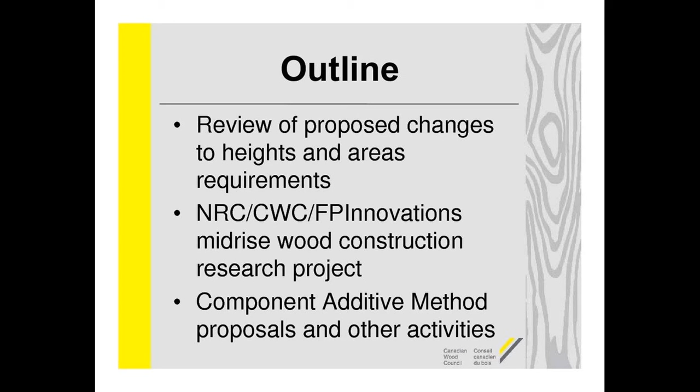As some of you are aware, our code is now an objective-based code, but all the acceptable solutions are still found in Division B of our code nationally. It's Division B subsection 322 that talks about how to construct a building in terms of heights and areas based on construction type and occupancy type.

Our code has come to the point in 2010 where we really only consider in Canada two types of construction: combustible construction and non-combustible construction. That's different from a lot of other jurisdictions—even the United States has multiple types of construction that allow different heights and areas for those different types. In our system, even heavy timber construction has really become just a very small, specialty subset of combustible construction, and there aren't a lot of different provisions in terms of heights and areas when you're using heavy timber construction.

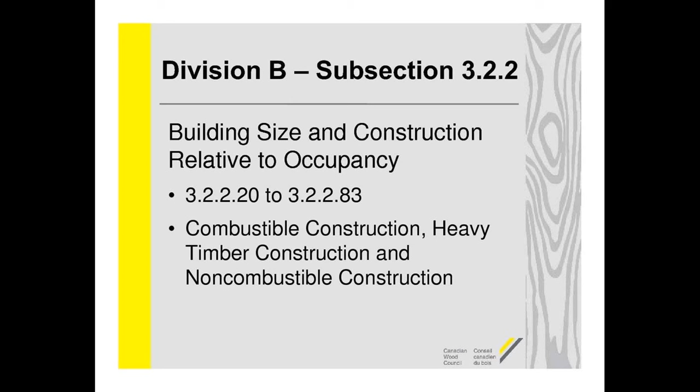So this is just a summary example of how our code deals with heights and areas in terms of number of stories and the maximum building area, basically the footprint of a building. There's a very specific definition of how to calculate the building area. But within the context of an occupancy type and the number of stories, the maximum allowable building area changes depending on whether you've got a sprinklered or unsprinklered building, and whether, when unsprinklered, it faces 1, 2, or 3 streets—that's for firefighter access. The greater the number of streets faced, the greater the building area permitted.

So that's how our code currently works, and this is just one example of the residential type Group C. There's also an example here for business type, and the reason I mention these two is because these are two of the areas that the mid-rise code change proposals particularly targeted.

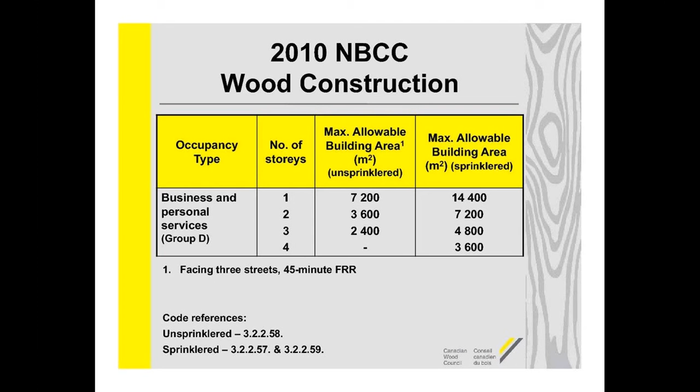Now, not all of you are familiar with the national code process, so I'm going to give you a little bit of an idea of how it works in general, to understand how the code change proposals were developed for mid-rise. The CCBFC, the Canadian Commission on Building and Fire Codes, is a volunteer stakeholder organization that works with the Code Center at NRC as the secretariat, which basically provides the overall policy and guidance to the national codes in Canada. They do that in consultation and partnership with PTPACC, the Provincial Territorial Policy Advisory Committee on Codes.

That one always gets me.

The provinces are directly linked because they're the ones required under the law to implement building codes, to adopt and implement them. They have their own ideas of the things in their provinces that are important to them, what areas they believe need to be looked at. The idea is that at the national level, we try to coordinate the priorities based on the provincial priorities.

And so they have provided quite a bit more guidance in recent years as the structure was developed. Under the CCBFC are the standing committees, which are the technical bodies, again made up of volunteers from all segments of the construction industry, that provide technical recommendations to the CCBFC on code changes that are necessary or desired. For example, the Standing Committee on Fire Protection or the Standing Committee on Houses and Small Buildings.

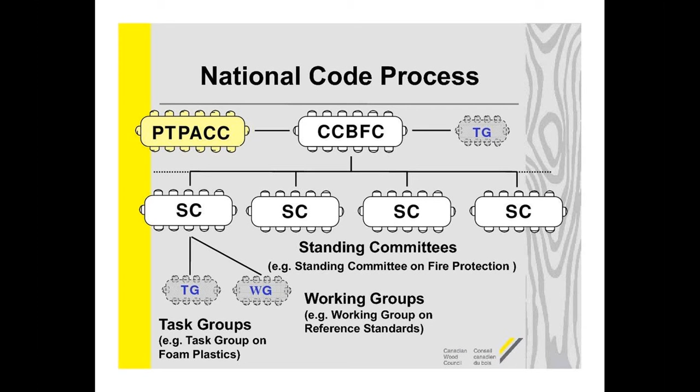When it came to combustible construction, in 2009, some of you are aware, British Columbia put forward a change to their code related to 5- and 6-story combustible construction for residential only. Partly due to that, and due to interest in that code change proposal in other provinces, and because the Canadian Wood Council also was interested in seeing mid-rise combustible construction...

...it was decided that a joint task group should be created, that this should be something done in the 2015 code cycle, to look at the whole question of why our codes deal with combustible and non-combustible construction the way they do. So the Joint Task Group was formed based on that policy decision that this was something that should be looked at.

There are often joint task groups when there are topics that affect or deal with more than one topic or part of the code. In this case, it was decided that the joint task group should actually report to 5 different standing committees.

And actually, I'm pretty sure that almost all the other standing committees have looked at these code change proposals as well. Even the Part 9 Standing Committee on Houses and Small Buildings has at least reviewed the code change proposals in their meetings, just to keep an overall view of the whole process.

So the Joint Task Group was formed, and it was set up, like any other task group, to be made up of stakeholders. The Code Centre has a policy within that system to make sure that you have full representation for all the interested stakeholders, as well as regional representation. So there were regulators, industry reps, general interest groups, fire services, different provincial and municipal regulatory bodies, as well as the construction material interest groups.

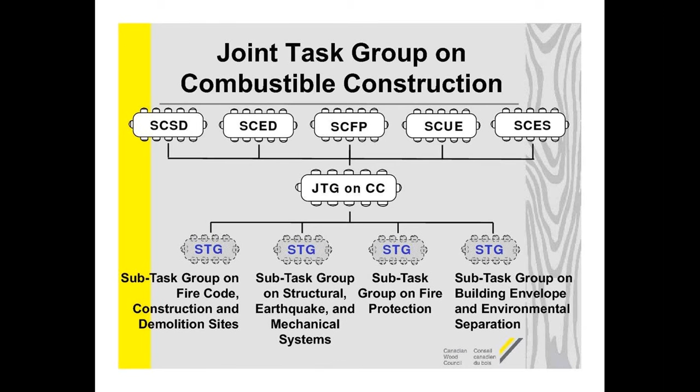And so that's where we came to today. The Standing Committees provided, or recommended, a finalized version go to public consultation this fall, and the CCBFC agreed that the package could go out this fall.

As you're probably aware, there's a public consultation ongoing right now, and as I didn't realize until just over a week ago, the closing date has moved from December 13th to December 23rd, which is good for me because I haven't reviewed all the code change proposals outside this package yet, and I need that time.

But as I just alluded to, this public consultation is much more than just the 5 and 6 story issue, and you guys have been talking about some of the other areas. There are a lot of very interesting code change proposals in this package, in part because this is the last major public consultation for the 2015 code. So it's a jam-packed session, really.

So when it comes to the actual code changes for mid-rise, as I said, one of the bases for the original discussions was what British Columbia did. On this slide, you've got 1, 2, 3, and 4 stories for Group C residential on the left-hand side showing what's currently in the National Building Code, and then what's encircled in red is what British Columbia did in 2009, as an interim change, and then formalized in their 2012 code last year.

What they did was take a methodology that's been pretty consistent in a lot of sections of our code for height scenarios, sometimes referred to as the wedding cake approach, although that's not really a fully appropriate analogy. The idea is that you take a certain floor area for 1 story as your building area, and if you divide that floor area by the number of stories to create the building area for that number of stories, you end up with a building with a similar level of risk or hazard, as long as other things like construction, fire resistance ratings, and other requirements are all the same.

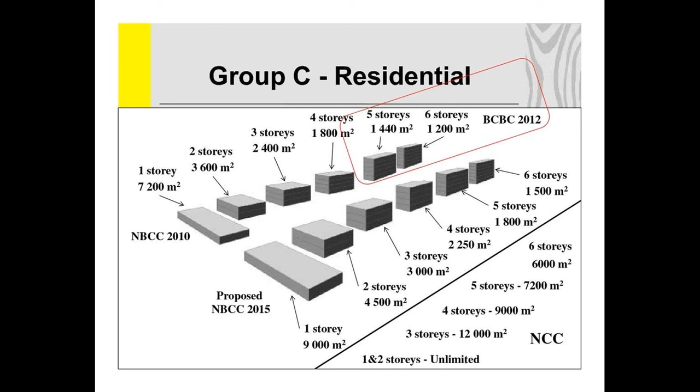But, you know, small steps, and we're all happy that we've managed to get this far. One of the other things was that British Columbia, because they wanted to do a relatively quick change in 2009, only looked at Group C, and the Joint Task Group agreed that in part this would be useful for things like Main Streets, where people wanted more density, but also wanted to have small coffee shops and mercantile on the main floor, or maybe the first 2 floors, and things like office space.

So it was proposed that Group D would be permitted to go to a full 6 stories. And again, looking at the heights and areas for the National Building Code or what BC still has, I did this presentation last week in BC, which is why I show the BC code reference for this one too. Again, the proposals provide for a larger building area at each number of stories, starting at 18,000 square meters for 1 story instead of 14,400, ending up at 6 stories at 3,000 meters instead of what would have happened with 6 stories if you just took the original areas. And as I said, we're nowhere near what non-combustible construction is currently permitted.

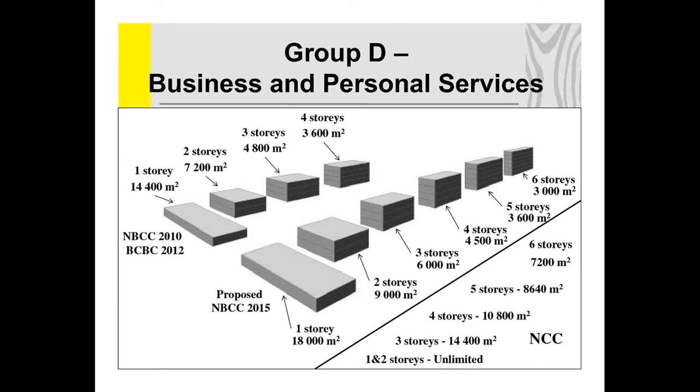As well as being permitted Group C and Group D, any building that contains both of them could be 6 stories of combustible construction with the same requirements in terms of other performance aspects. One of the other things our code does is if you have a group or division of occupancy that is not permitted to go to a full 6 stories as a major occupancy in your building, then you either have to make separate buildings or conform the whole building to the requirements of the code at that height. But the Joint Task Group discussed mixed uses in terms of mercantile in particular. The Wood Council had proposed a 6-story mercantile, but it was decided that was a little too much at this point, so instead they've gone this route.

When it comes to mixed uses, Group A Divisions 1 and 3, Group B and Group F Divisions 1 and 2 will not be permitted at all in a Group C building of this type. But on the first and second story, Group A Division 2, Group E, and Group F Division 3, which is where storage garages, our parking garages, fit, will be permitted, and the Group F Division 3 would also be permitted on the third story. The proposals also include some increased fire resistance ratings for separation between those major occupancies. And there are additional proposals that not only are you permitted these occupancy types as major occupancies within the permitted stories, but you can use the same construction type, combustible construction, 1 hour, except for the separation requirements between occupancy types, for those parts of the buildings, even though there is no 6-story Group A2 and no 6-story Group E.

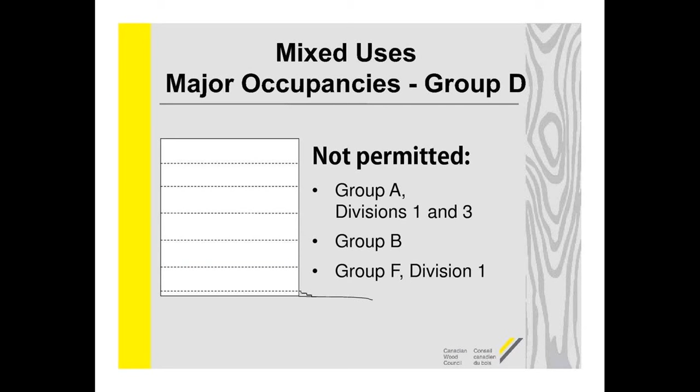The same thing with Group D, even a little bit more; there are fewer restrictions on what's permitted. Group A Divisions 1 and 3, Group B, and Group F Division 1 are not permitted. And in Group D, on the first and second story, you're allowed Group A2s, Group E, and Group F Division 2s and 3s, and again the F3s on the third story. Again, with some increased fire resistance rating requirements for separations between those major occupancies.

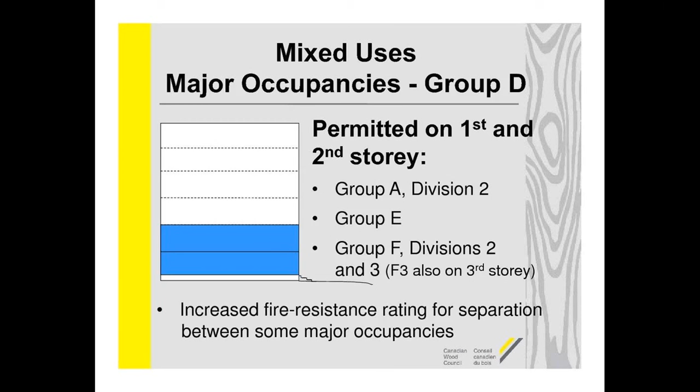In addition to that, a bit like what British Columbia did, there's actually a new provision. There's almost no place in our building code, except in defining what is considered a high building and when high building requirements kick in, that actually has a physical height restriction. But for these buildings, these 5- and 6-story buildings, the proposal is to have a physical height restriction based on the distance between the floor of the first story and the floor of the uppermost floor level.

And that wording is important because, as some of you are aware, our code has some provisions that allow mezzanines to not be considered stories. And so the discussion was to ensure that a building that was called a 6-story building by the definitions of our code was physically a 6-story building in terms of sticking to an 18-meter height limit. And so, as opposed to being the floor of the top story, it's the uppermost floor level. So even if that's a mezzanine that doesn't count as a story, then that is the distance that you're measuring.

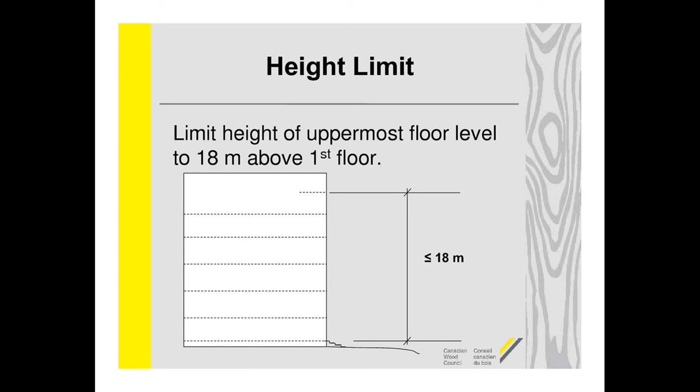One of the other additional requirements is that even though these buildings are sprinklered, there is a requirement for a 1-hour fire resistance rating for the roof, unlike any other building. And there are also some additional requirements related to the roof. If the highest point of the roof is 25 meters or lower, then you can use combustible construction for your roof, and you can use Class A, B, or C roof coverings. That's fine. You would be like any other combustible construction building. If the highest point of your roof is higher than 25 meters, then the whole roof assembly system has to be non-combustible or a fire retardant treated wood system, and the roof covering has to be Class A.

Now, the one thing that was brought up was, well, what happens if you have varying heights on your roof? Well, the language is such that if that varying height of roof can be considered a single contiguous roof, so if parts of the systems join up in terms of the surface of the roofing, or the sheathing, or there's a contiguous roof space, then those two roofs have to be taken together. So if the upper portion is above 25 meters and the lower portion is not, then you would still have to meet the upper portion requirements of non-combustible construction or fire retardant wood roof construction and a Class A roof covering. However, if those two sections were considered not contiguous, then each of them can be measured on their own.

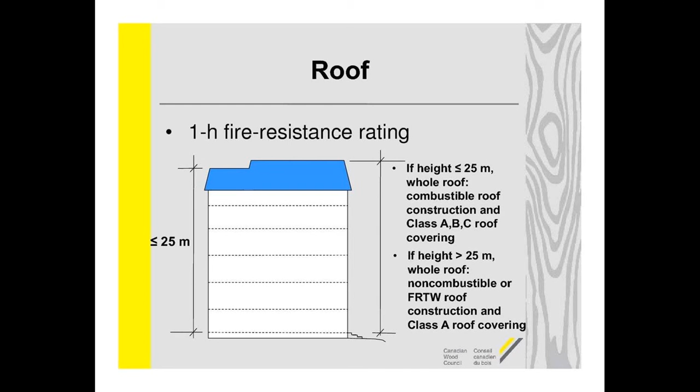And so if you had a lower section that was completely separate, and that portion was below 25 meters, it would be permitted to be combustible construction and Class A, B, or C, and then only the upper roof would need to meet the more stringent requirements. Of course, the majority of the extension is 5- and 6-story buildings, and for residential occupancies you need NFPA 13 anyway, so these buildings typically will have NFPA 13. For those buildings that are 4 stories or less, because we have provided larger areas for those 1- to 4-story buildings, those will need NFPA 13 even though they are 4 stories or less, which NFPA 13R permits.

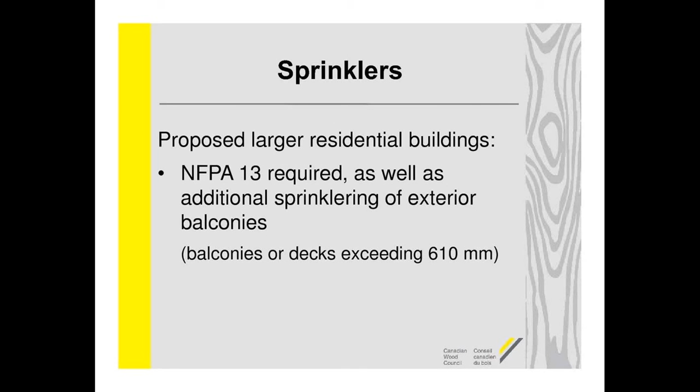A bit different from what British Columbia did on the exterior walls, it was decided that the proposal would go forward saying that only when you have a building that's 5 or 6 stories under these provisions, and only on the 5th and 6th stories, will the cladding need to be non-combustible or cladding that meets the requirements of the exterior wall assembly test, CAN/ULC-S134. British Columbia went with the entire 1 to 6 stories being required. Well, because they did the extension, their 5- and 6-story buildings have to have all non-combustible cladding.

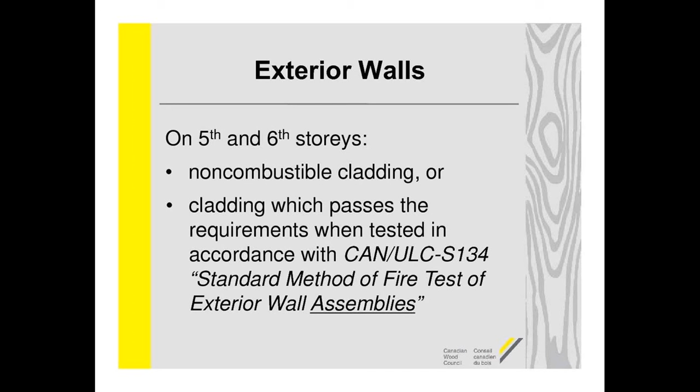One of the big differences from what British Columbia did is this requirement here, and this has to do with firefighter access to the exterior of the building. As some of you might know, I did mention that when you have an unsprinklered building, you're permitted larger building areas based on whether you face 1, 2, or 3 streets. Some of you are also aware that facing 2 streets and facing 3 streets has in the code a very strict definition related to the percentage of perimeter of your building and how far it is from a street or access route. To be considered facing 2 streets, 50% of the perimeter of your building has to be within 15 meters of a street or access route, and for 3 streets, it's 75%. There is no strict percentage requirement within the code currently when considering facing 1 street.

And as a result, the interpretation has been that basically your exits have to face that street. And so your exits have to be within that 15 meters of a street or access, or your major exit, for it to be considered facing 1 street.

There was concern that that wasn't enough exterior access for these buildings, particularly since the proposal is to go with slightly larger building areas than the current 1 to 4 stories even. And so the proposal's gone forward for a strict definition of facing 1 street of being 25% of the perimeter of the building has to be within 15 meters of a street or access route.

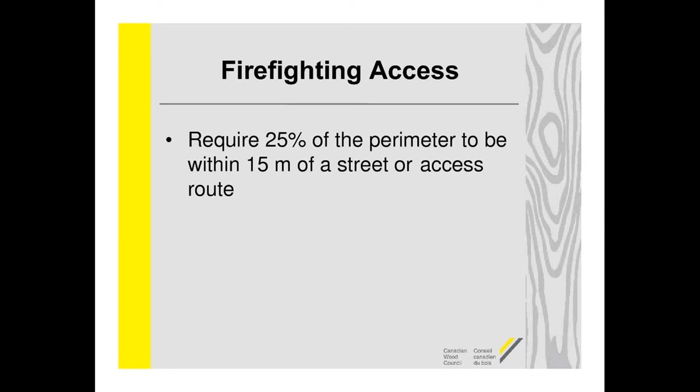Another thing related to this that some people were concerned with was you can create separate buildings just by putting in a firewall under the code. And so there was some concern that if you had a very large property or a full city block, you could create an entire block of this type of construction using firewalls, creating separate buildings, and that some of the buildings wouldn't have sufficient access for fire services from the exterior.

And this is just an example that the Code Center put together. I do have a few slides of these because they did such a nice job of their slides that I didn't want to have to recreate them. This is one example where, in this particular scenario, because there's no access route or street behind this building, and making the assumption that this is a rectangular building, not a trapezoid, that you're just seeing it in perspective, and that the short sides of each section are the same length and the long sides are the same length.

The center portion, what's called Building 2 there, would not be considered facing 25% unless that was a square, basically. And so this particular configuration would not work for this site under these provisions. There would have to be some other design scenario in terms of how to divide up the building and maybe even provision of access routes on the site.

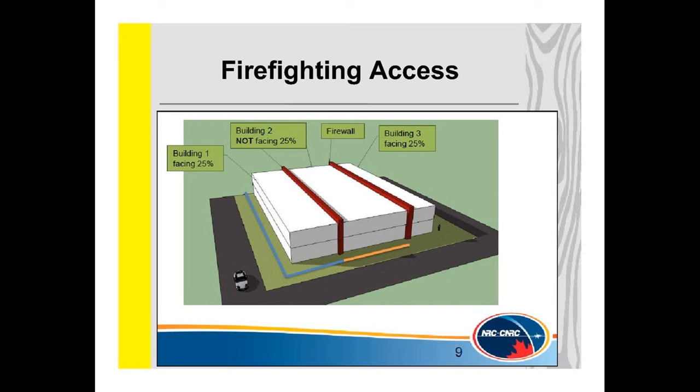The other provision that is put forward in conjunction with this is that the portion of the street or access route that's used to measure that 15 meters of 25% of perimeter cannot be more than 2 meters below the floor of the first story. And that's, again, to facilitate firefighter access.

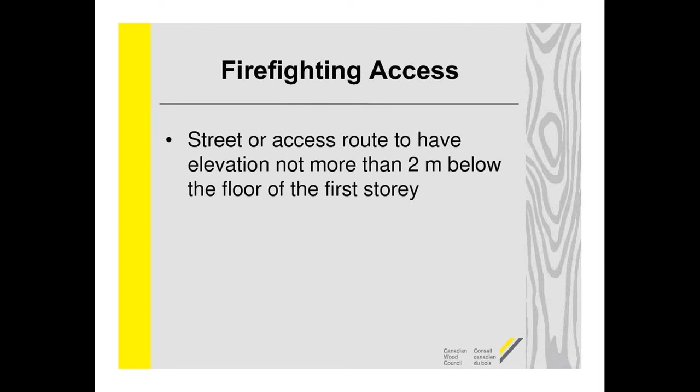Now, you have to picture that this fire truck is not to scale, because if the dimensions are correct, then the height of that podium or berm or whatever you want to call it would only be 2 meters, and I'm only 1.5 meters, and I know fire trucks are taller than me, so the truck would be higher than probably that berm. And that's the idea, is that in some places access routes are sometimes at the bottom of cliffs and hills, and the idea of the 25% perimeter facing a street or access route is so that the fire services have access at an accessible height as well as distance.

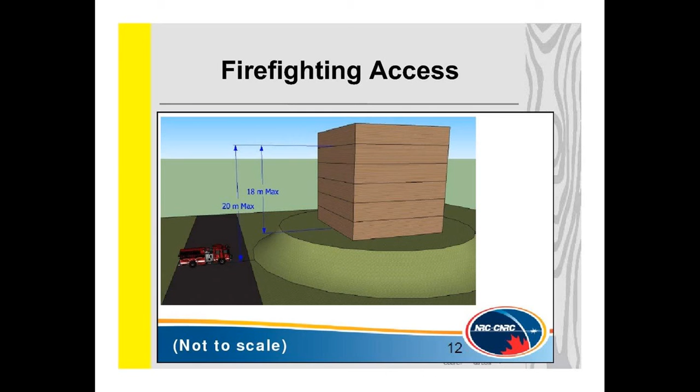As well as those things, there are a few other additional fire protection features that are proposed as requirements. One is more fire blocking, even in the sprinklered combustible concealed spaces, unless they're filled with non-combustible insulation, as per NFPA 13. Part of the idea was that we have bigger buildings, and we wanted to, at least in this stage, make sure that we were putting as many barriers to fire spread, especially within concealed spaces. Another provision is double duration of emergency power supply for lighting and fire alarm systems.

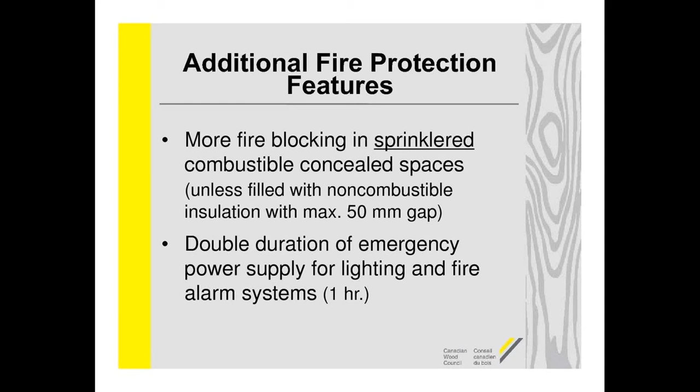Now, one of the subtask groups also dealt with a number of issues on the list that related to construction site safety. And at the national level, the National Fire Code does have a section, section 5.6 in part 5 of the code, on construction site safety. And so that subtask group reviewed that section and provided some additional proposals for these buildings.

Now, some of these provisions, it's been discussed at the subtask group, at the joint task group, and in some of the standing committees, that some of these seem pretty reasonable for other buildings, other construction sites as well.

Because these proposals are all for a new permitted building height and area, there was no cost-benefit analysis required for the code change proposals. However, if you were to put forward similar code change proposals applicable to existing buildings, existing provisions of the code for buildings that are already permitted, those would require a cost-benefit analysis, and that was not something that was within the timeline that the subtask group, joint task group, and standing committees had.

So it's possible that some of the more generic ideas, or ones that seem like they might be good for other sites as well, will be reviewed in the next code cycle to see if any of them should be added in a general way to a majority of construction sites. Some of the debate was that in some cases that might be all building sites; in other cases, it might be only Part 3-4 building sites as opposed to Part 9 building sites. That's where part of the cost-benefit analysis would come in.

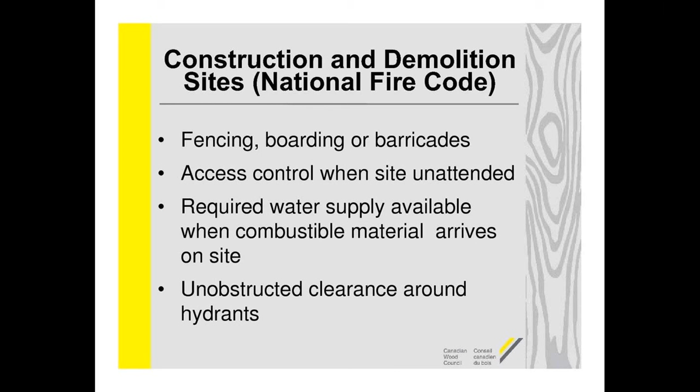Some of these I put in the same category as being a good idea for a lot of different sites, but they are being proposed just for the 5- and 6-storey buildings at this time—minimum clearance between exits and waste containers, so that in case you end up with a dumpster fire, any people within the building under construction can evacuate safely.

Those jurisdictions that actually allow smoking at all on a construction site—there are no current provisions in the fire code about how to deal with that, so proposals have been put forward to deal with where smoking areas should be located and what type of containers to use.

In addition, there are some additional requirements for minimum clearances between roofing kettles, exits, means of egress, and exposed combustible materials, again to keep people on the construction site safe from accidental fires in those cases.

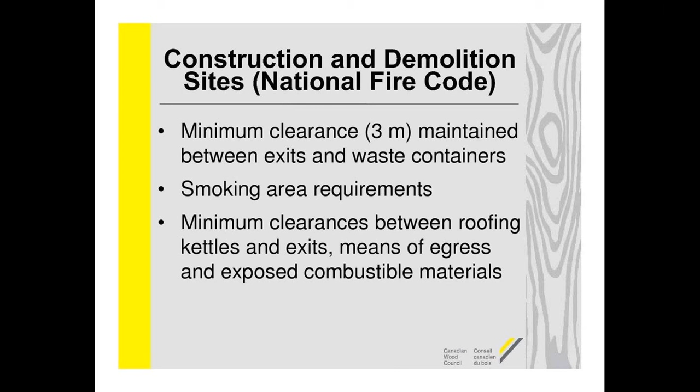We were fortunate in some aspects that British Columbia decided to go first because they right away had to start thinking about earthquake design. The code didn't have the factors necessary to deal with taller wood buildings because taller wood buildings weren't permitted under the code, so there was no need up until 2009.

As a result, the very first pass that BC did was very conservative. In 2012, there were some updates provided based on people reviewing information from other jurisdictions like Japan and Europe, as well as new information being developed in Canada.

My understanding is that the 2015 code change proposals, under the actual website consultation, these earthquake design proposals aren't under the mid-rise package. They're under Part 4 structural things, in part because some questions were raised about other types of construction as well. So there are some other proposals tied to the whole review done of the safety factors for lateral earthquake force and that sort of thing.

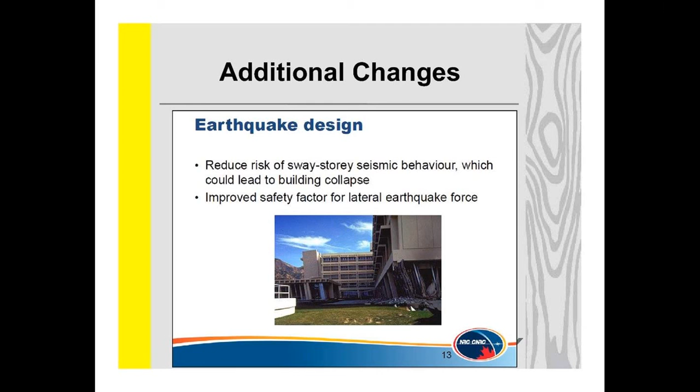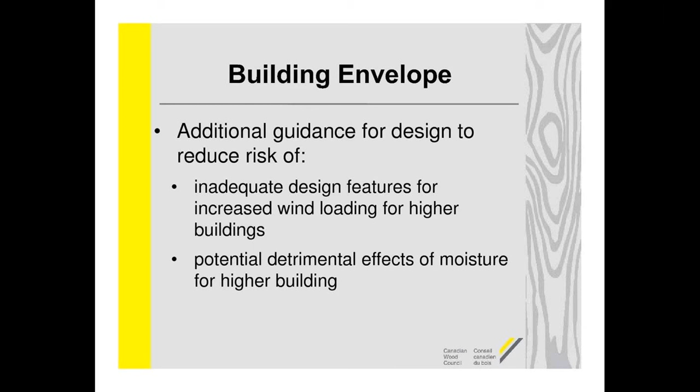And of course, British Columbia has already looked at some of these aspects. I'm going to pause here for now to see if there's any questions, and CSP is going to look to see. I know we've got something flashing here, I'm not sure exactly if any of them are.

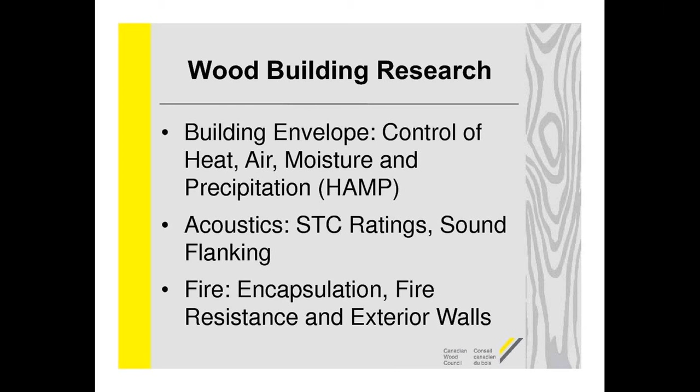When it comes to building envelope, I'm far from being an expert, but I'm told that what they had to do was identify all the envelope details they wanted to examine and choose climate locations and loadings based on those locations. The researchers looking at this actually had to wait a little bit to see if any of the decisions on the fire side and the acoustic side might affect the envelope details they wanted to investigate. So they started their part of the research quite a bit later than the other 2 groups, but they have done water penetration lab experiments and hygrothermal modeling and analysis.

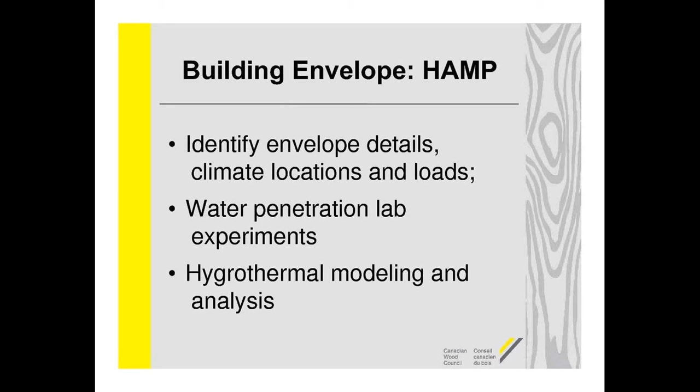The main point of their part of the research project is to look at some alternate wood-based building envelope solutions developed in British Columbia and elsewhere, in conjunction with some of the practical expected requirements just because of structural and that sort of thing, and whether or not those envelope solutions meet the National Building Code 2010 Part 5 requirements, but also how they meet the National Energy Code for Buildings 2011 overall heat transmission requirements for the maximum envelope overall heat transmission requirements.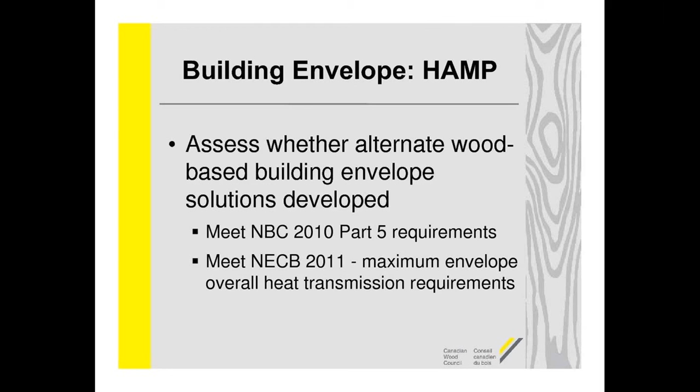In acoustics, as I mentioned, some of the structural things we were looking at — because when you have 5- and 6-story light frame wood buildings, you end up, particularly on the 1st and 2nd story, with much higher structural loads that you have to deal with. As a result, we've been seeing some variations on structural walls on those levels, for which we didn't have any specific tested information.

In terms of acoustics, the experts could tell us whether the sound transmission class rating would probably go up or down, but not by how much, and what effects would cancel each other out. So there was a large group of sound transmission class rating tests done on light frame wall assemblies. One aspect was staggered studs, which hadn't been looked at in much detail before, as well as walls with wood shear panels in them.

With the single studs, we're seeing sometimes really close spacing to deal with the structural loads, up to the point where in one case I saw 100 millimeters on center, which means you've got about 40 millimeters to get your hammer in to try and put the toenails in to nail this to your top and bottom plate.

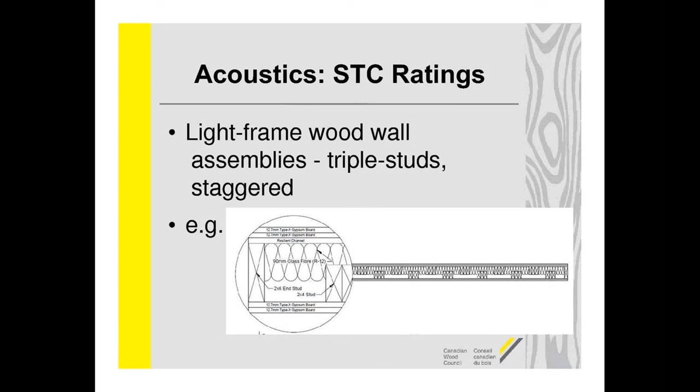As well, we've seen this new product, cross-laminated timber, that sort of started going gangbusters in North America over the last 3 years. A lot of the information we had on sound transmission class ratings was not generic — it was proprietary information based on European systems. So there was a desire to actually have some generic information.

So they've done similar testing on cross-laminated timber systems, walls and floors, again looking at how the attachment of gypsum affects things — first the bare panels, then attachment of membranes, attachment of gypsum using resilient channels, whether screws or nails make a difference, spacing, all sorts of different aspects again.

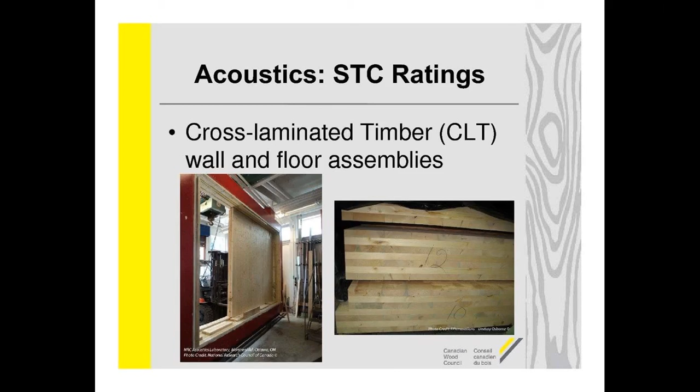Now, a sound transmission class rating is a laboratory test of a single wall or single floor, and as those of you who have built structures know, sometimes how you put those walls and floors together can really affect how well you maintain that effectiveness of the sound transmission class rating. That is due to what's called sound flanking.

More of that has been discussed as an issue, and the wood industry had done a lot of research into light frame wood assemblies and the sound flanking in them. But again, because these wall systems in particular have changed quite a bit, especially on the first and second story to deal with structural loads, it was decided we'd also see how that would affect the sound flanking, because of course you've got more members coming into your bottom plates. That's going to possibly have more sound transmitted through your floor assembly, that sort of thing. So they've done that testing.

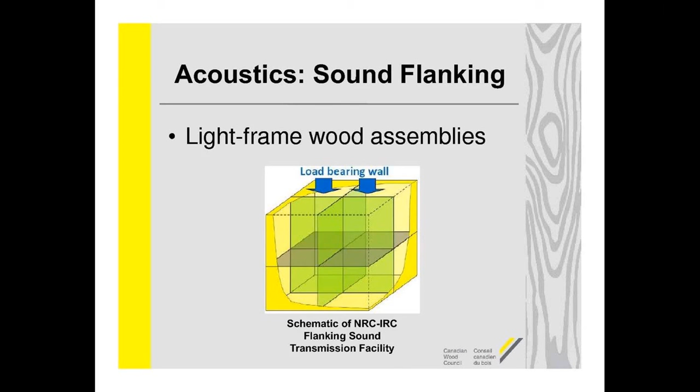And they did also sound flanking testing for cross-laminated timber. Now, cross-laminated timber is a massive timber system, and so the NRC acoustic scientists thought, well, we know there is a calculation methodology for determining the flanking of sound for concrete systems. They're a massive construction system as well, and they wondered if CLT would behave in a similar manner — that a similar model, with maybe different factors due to the different densities and mass, and therefore different sound transmission functions, I'm not sure, it has to do with hertz and all that sort of thing, whether they could modify the model to work for CLT.

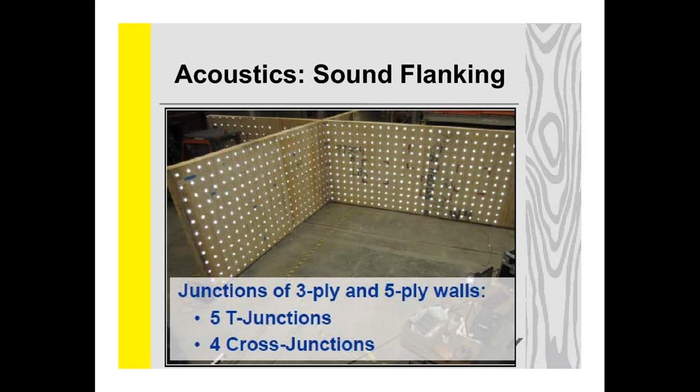And the testing they've done has been promising. Unbeknownst to us, we discovered just, I think in June, a research group in Spain has been looking at a similar methodology, so we've sort of got independent confirmation that this method might work.

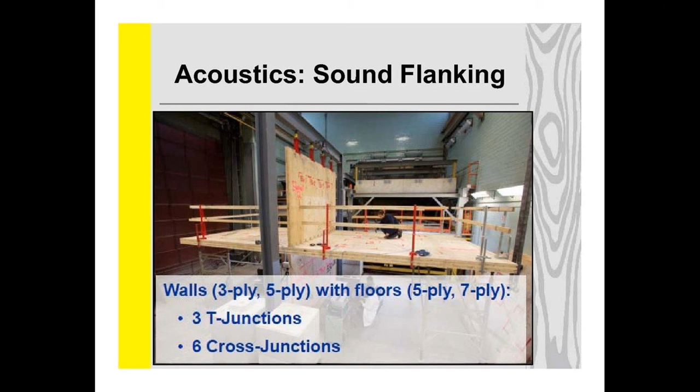One of the reasons why acoustic flanking sound has become even more important is that there's a code change proposal going forward looking at requiring an apparent sound transmission class, which incorporates the idea of dealing with sound flanking. So a lot of the information I just talked about will be added to documents put together by a consortium group at NRC.

As that group realized, the number of possible combinations of how to combine wall and floor assemblies is almost infinite. Although this guide has basic information on what to look for and some examples, not everything can be put in there. My understanding is there's another group at NRC, a consortium of industry and NRC, putting together software called soundPATHS that will also assist. Also, unlike the wood industry, which does have a lot of this information, the light frame steel industry does not, and is having to generate some of this information, at least on the acoustic flanking side.

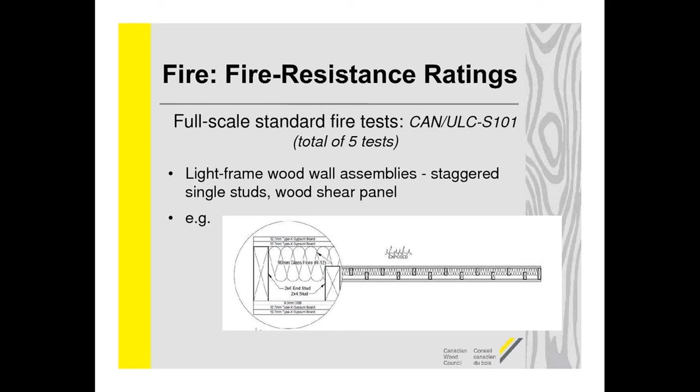So we did 5 full-scale standard fire resistance tests of light frame wall assemblies. We looked at staggered studs, which we didn't have a lot of information on, wood shear panels, which we also didn't have a lot of information on that we could use, and things like triple studs. We will have additional information that we can provide on the specifics of those aspects.

One of the other aspects we looked at was standard exterior wall testing. I mentioned in the code change proposal that CAN/ULC S134 is one of the ways to test exterior cladding to be allowed - the proposal is for the 5th and 6th story on these buildings. It's also used for spatial separation requirements, sometimes when non-combustible cladding is required due to spatial separation. If you've got a cladding that meets S134 in conjunction with the wall assembly system being used, it can be used.

This is also used in the requirements for permission in buildings required to be of non-combustible construction, to permit any type of combustible elements in non-load-bearing combustible elements in that exterior wall assembly, currently in the 2010 code. In the past there hasn't been a lot of call for cladding systems on a wood-based structural system, in part because the S134 requirements for non-combustible buildings required that all the combustible elements be non-structural, so there hadn't been a lot of testing done with structural wood elements.

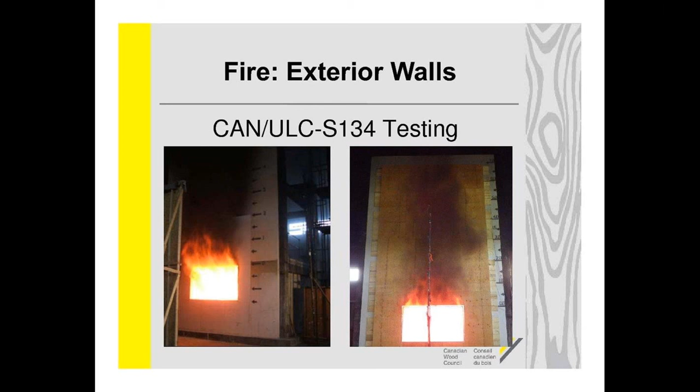So it was decided to try and come up with a series of tests that would test a base system, so that any non-combustible cladding could go onto such a system and would be good to go. This is because not even all non-combustible claddings would pass this test when there are other combustible elements in the wall assembly. And because S134 is a test of the entire wall assembly, it was decided to go this direction.

So what was done was 4 tests. 2 of them were on light frame 2x6 wall assemblies with spray polyurethane foam insulation - 1 used standard exterior gypsum sheathing, and the other used fire retardant treated wood. 2 assemblies were simulated CLT with 2x6 furrings using XPS foam insulation, and again, 1 used gypsum sheathing and 1 used fire retardant treated wood sheathing.

The idea being that any of these 4 systems tested that pass the requirements within the building code Section 3.1.5.5 for non-combustible construction could then be used as a base system for any type of non-combustible cladding. Combustible cladding systems would have to be tested in addition to this. But it would also provide base data for manufacturers of such systems to know where they might be.

This is a large test - I didn't actually talk about the assembly, but it's almost 7 meters in height. It's a 3-story wall, basically, with a single opening, and something like 4 meters across, maybe. The only facility in the world that can do this test is NRC's lab out near Mississippi Mills.

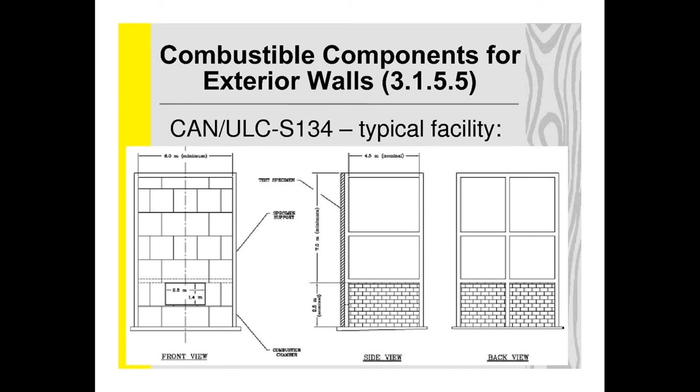They sort of get spurts of people wanting to test for this, but they're the only facility that has this thing, so it's quite an expensive test to do. So you don't want to have to test every possible combination if you can get away with some generic information.

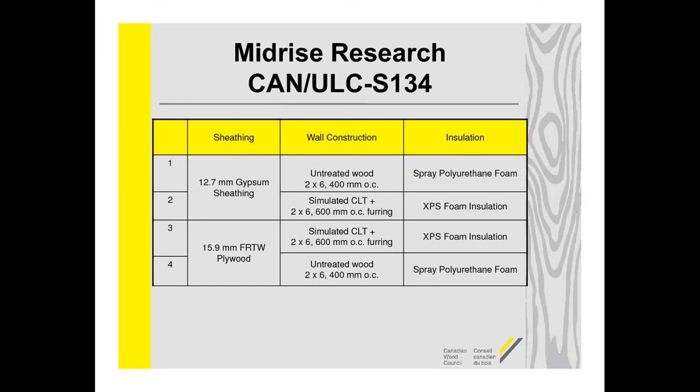The last thing we did in terms of fire was looking at a concept called encapsulation. It's a concept the Europeans have been using as one means of dealing with combustible structural elements versus non-combustible structural elements. The idea is that the main difference between combustible and non-combustible structural building elements is that combustible ones may eventually contribute to the fire itself - they can provide fuel load once they become involved.

So if you can encapsulate them for a certain period of time so that they do not become involved in that fire, then the idea is that for that period of time they are performing similarly in that aspect to non-combustible construction. Of course, the actual fire resistance aspect has to be dealt with for all construction types, and so that would still have to be in place.

But in dealing with encapsulation, we first wanted to get some very basic research data as to how some of the typical materials we might use for this type of encapsulation actually perform using the standard fire resistance temperature time curve. We used the intermediate scale furnace, hoping that if this concept goes forward, we could develop a relatively easy, smaller scale test to evaluate new materials. Using this horizontal furnace at NRC, a smaller furnace, we measured things like the heat transmission through various types of materials that might be considered for encapsulation.

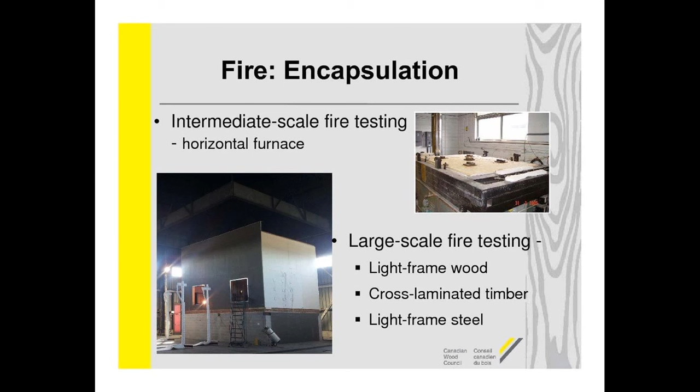We did 3 of these tests with 3 different types of construction. One was light wood frame, one was cross-laminated timber, and for those 2 we used the encapsulation approach so that all the structural members were encapsulated in 2 layers of Type X gypsum board. Then we did a 3rd test, which was the exact same scenario and footprint using code-conforming light frame steel assembly that would be code-conforming for a similar type of building: 5 or 6-story, non-combustible construction, 1-hour fire resistance rating.

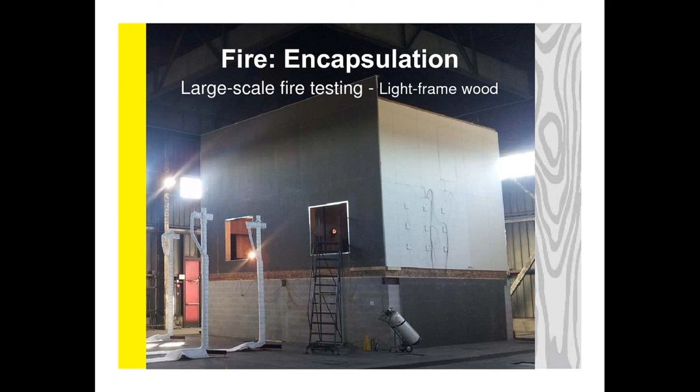The main floor unit and the unit above were fully instrumented. We had thermocouples to measure temperature, not only throughout the space, but in between gypsum board layers, within the stud cavities, the floor ceiling cavities, in between layers. There was a full floor system in here in that it wasn't just subfloor.

It was, in the light frame system, wood system, it was I-joist with a structural wood panel subfloor, plus we used cement panels to simulate a concrete topping so that we didn't have to wait for the concrete to dry. And then we put a full flooring system on there, a wood floor system with acoustic material underlay and all that sort of thing. And we basically ignited the bed and watched the fire progress and recorded all this information.

In addition to that, we also had the towers you see on the outside of the building to the left. Those are heat flux gauges, and you can see that they're aimed at the windows to determine how much heat is being generated, and the measurements are at different distances from the building. And you might vaguely be able to see in the shadows above the building what's called a hood, and it actually captures all the heat and gases generated from the fire, and there's instrumentation in there that can then calculate what the heat release is of the fire, therefore how much fuel is being consumed at any given time.

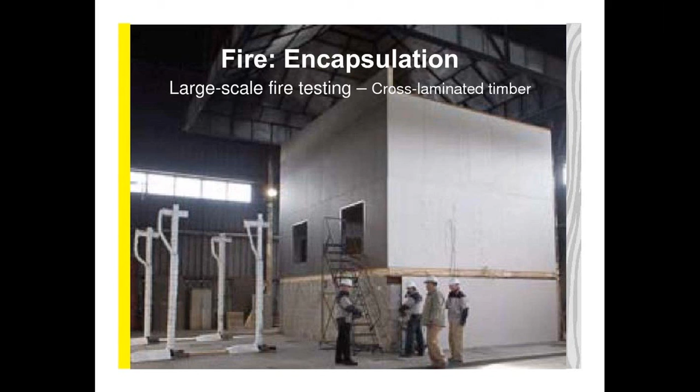And the main idea between the two wood systems and the steel system was to look at the contribution of the structural wood systems to the fire with respect to fire growth and heat release rate, and compare the steel frame system, where the only combustible materials were the contents of the rooms, and the other two where you did have combustible structural elements. So that's the research we've done.

As I said, the reports will be forthcoming in the new year. NRC has a deadline of March 31st for all this project to be completed. So, as you can imagine, there are multiple test data reports, and then there's the analysis that has to be completed of all the information. I know I've reviewed 9 reports so far. I've got 4 more to go, and I believe there's at least 4 more to be finished in draft form. So a lot of data has been generated. There should be a good amount of analysis as well. And so look forward to that in the new year.

One of the other things I wanted to mention, in part because I was on the task group that did this, and I really think it was a big achievement for the code process this code cycle. A lot of you may be familiar with the Appendix A Part 9 generic fire resistance rating tables. And some of you may also be aware that Part 3 does not reference those tables. And so I always get the question of why can't I use those tables for Part 3 buildings? And there's really not a great explanation other than the fact that the data that was used to update those tables was never incorporated for Part 3 buildings, in that currently the only methodology in the code for Part 3 buildings was the component additive method.

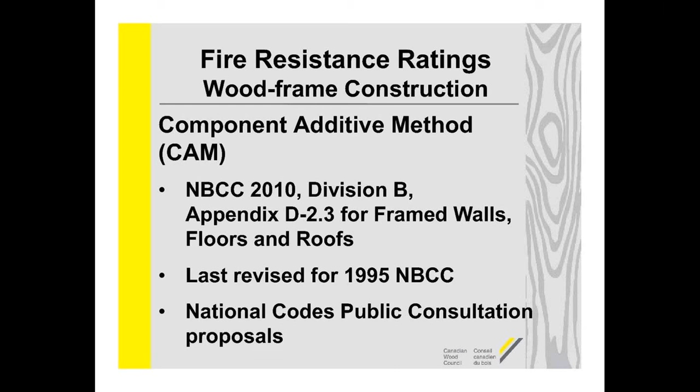And I think in the past, everybody looked at this and thought, oh my God, this is a huge monumental task. It's not as simple as just filling in a table. It's going to take a lot of work. And so finally, this code cycle, we got it started at least, and there's been a number of changes proposed. It's in this consultation as well. As I said, the previous versions did not include a lot of the things that we currently use in our construction. So at least for wood assemblies, there were no more than, I don't know, 8 or 9 assemblies total that you could develop out of that methodology. So it wasn't that useful other than for the membrane-only fire resistance rating table that's later in the methodology.

The proposal that's gone forward now adds new provisions for double layers of gypsum board. It's added load-bearing cold-formed steel studs and joists. I have to give them a shout-out since we worked on that as well. But also wood I-joists have been introduced and more wood truss types. As well, there's much more information on different insulation types, as much as we could at this point, as well as the locations and how they affect the fire resistance ratings calculated within the methodology, as well as how additional floor toppings affect the fire resistance ratings. In addition to that, the current methodology was completely silent on the use of resilient metal channels, which of course for residential buildings and the acoustics requirements is pretty much necessary. And so that information has also been added in large part.

So the methodology as proposed has really become, I think, a lot more usable. The number of possible combinations has grown exponentially. I haven't done the math on that part yet. That's something I have yet to do, but certainly it's a lot more than 8. I would think that with the various combinations there might be hundreds, especially if you look at the options of different spacing of joists or studs and that sort of thing.

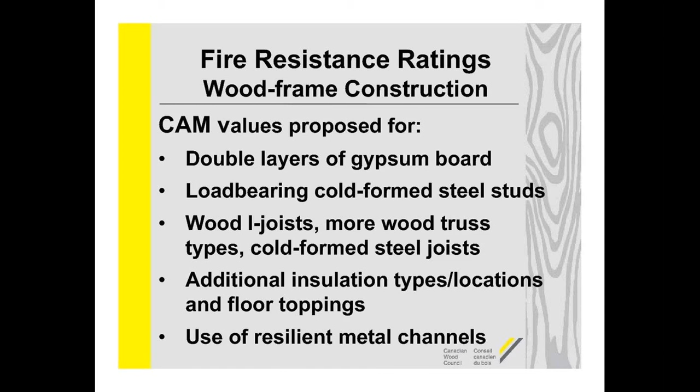As well, in this code cycle, some of you may be familiar with, in Appendix D of the Building Code, in D211, there is a methodology for calculating fire resistance ratings for glulam of 1 hour or more. And that methodology, too, has not been updated in a long time. And in the United States, a similar methodology is permitted to be used for both solid sawn heavy timber and glulam.

And so I often get the question, why can't it be used for heavy timber? And I said, well, because we haven't changed the code to say you can. Although we have confirmed that the methodology is good for that, we didn't get the wording changed. CSA O86 felt that perhaps what we should do is provide methodology for fire resistance for a lot of different large cross-section wood elements. So glulam, solid sawn heavy timber, and structural composite lumber as an informative annex in CSA O86 in this last cycle.

The basic principles are similar to what's in Appendix D, but one of the other things that has been determined over the years is that some of the methodology in Appendix D is a bit overly conservative for some types of beams and columns. Because of the nature of the methodology, it's nice and simple, but that simplification often means that you're more conservative in some cases than you need to be.

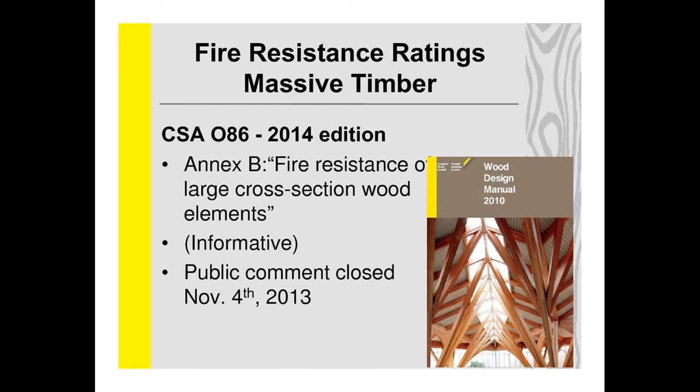There's a bunch of other additional activities that have been going on, just for your own information if you want to look them up when they become available, around the world, basically looking at wood construction, in part related to fire, in other parts related to structural. The Fire Protection Research Foundation in the United States, which is the foundation of NFPA, which does the standards like NFPA 13 for sprinklers, commissioned a report called Fire Safety Challenges of Tall Wood Buildings.

I haven't heard that it's been published. I thought it was supposed to be the end of November. It's probably going to be published sometime in December then. So look for that on the NFPA website; I think the FPRF link is there, so you could look to see when that becomes available. That report is being done by Arup, an international fire protection engineering firm, and it was commissioned for the insurance industry, who often do research through the Fire Protection Research Foundation.

As well, the Canadian Wood Council will be publishing early in the new year a fact-finding report that we commissioned from a consultant on historic heights and areas, and it should be a very interesting report. The report itself is quite extensive and contains extracts on heights and areas from, I believe, all English language codes from quite early on to current day, focusing in the last 60 years both on the U.S. and on Canada, and prior to that internationally.

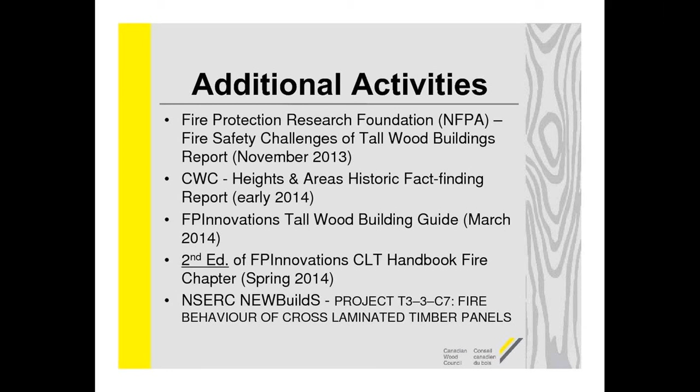And as I said, the Canadian Wood Council is one of these bodies; part of our mandate is to create technical information and tools for builders, designers, regulators. So check our website. We seem to be doing a lot of new stuff lately. And in particular, sort of unrelated to my area of expertise, one of my colleagues, Rob Jonkman, was involved in this. We produced a wall thermal design calculator. Its purpose is to provide designers with climate zone appropriate insulated wall assembly solutions.

The idea being that it'd be nice in one place to compare or to have the information for different energy efficiency requirements across the country, because different locales are using different requirements. My understanding is that it does the total nominal insulation value required in Ontario, the total assembly insulation value through cavities required in Quebec, and the effective insulation value in the National Energy Code for Buildings, the Part 9 National Building Code requirements, and similar requirements in Vancouver. This is being updated all the time, and I've been told it should be quite useful.

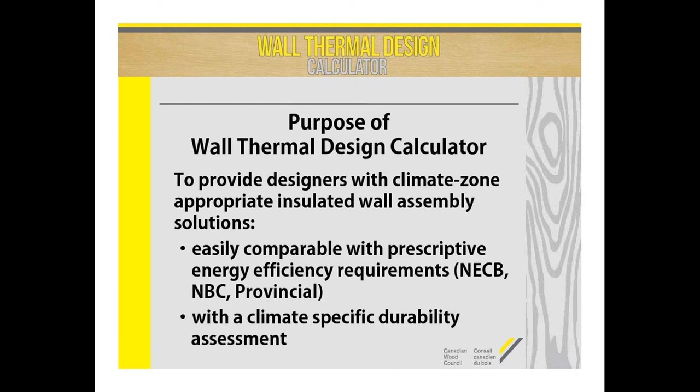The other aspect is that it provides climate-specific durability assessments of wall assemblies, so that you may have 2 or 3 different types that provide the same R value, but depending on your locale, one or another might be better for your climate based on durability, and it provides that assessment to you. So if you're interested, you can go to the CWC website, and there's the direct link to the page with the design calculator on it. So that's my presentation today.

I think I've got a couple of questions here. Yeah, it looks like we've got one question here, Inika. Another question came in, but let's do the first one. How did the BC Building Code and Fire Code respond to the fire in the first 6-story building in 2011?

Well, the fire in the first 6-story building was under the construction phase, and certainly at the national level, that was the aspect the subtask group on the Fire Code looked at, and that was one of the reasons for the proposed changes. With respect to the BC Building Code, they too have construction site safety requirements in their Fire Code. At the provincial level, they've been putting out additional guidance through the Fire Marshal's office on construction site safety requirements. One aspect has been education with builders in British Columbia, since they're already building these buildings, as well as keeping the fire service in the loop, because often they're responsible for inspecting construction sites for fire safety during construction, at least in BC. In other jurisdictions, like Ontario, it's a different provincial department responsible, the Occupational Health and Safety group, so these things are all a matter of education and enforcement.